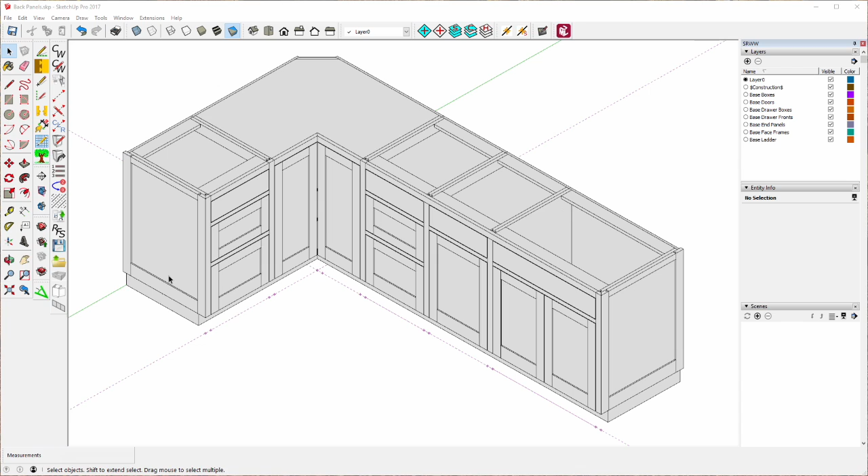You'll notice that this was designed to go up against a wall, but since this is an L-shaped island, I'm going to show you how to add back panels. But first we have to prepare it.

You'll notice that this trim sticks out a half inch. We need it to stick out the same thickness as the back panel we're going to put on. And the back panel is 13/16 of an inch, same as the face frame.

So first thing we're going to have to do is bring this out a little bit, and I'll do that right now. It's pretty easy. You choose this, right click, unlock it, right click again, edit component. Since it's a half inch now, which is 8/16, and we want it 13/16, we have to pull it out another 5/16. And now it should be out 13/16, and we'll just check that.

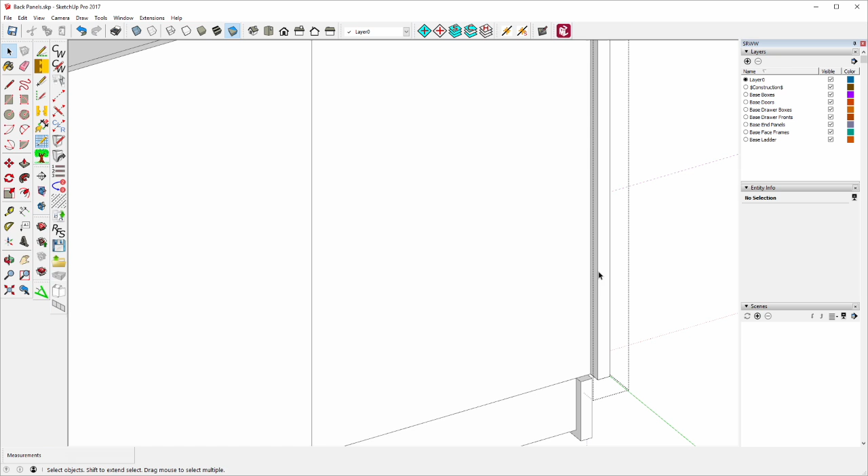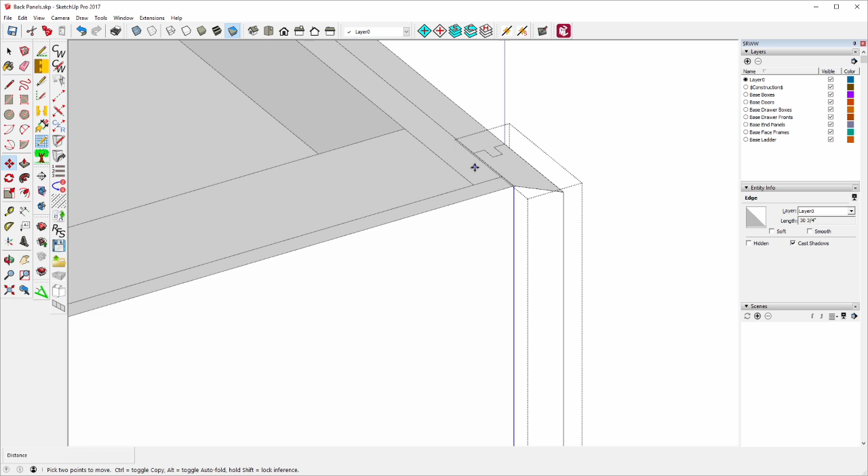Okay, the other thing is we want a miter joint here. So what I'm going to do is select just this edge here, that one right there, and move it with the move tool. I'm going to move it inwards 13/16. There we go. And let's just check it. That should give us a perfect 45-degree angle. And we can measure that to be sure.

It's not quite right, so we didn't do it quite right. Let me do it again. That should be it right there. And we'll measure it again one more time. Now it's 45 exactly. Okay, so now we have our miter.

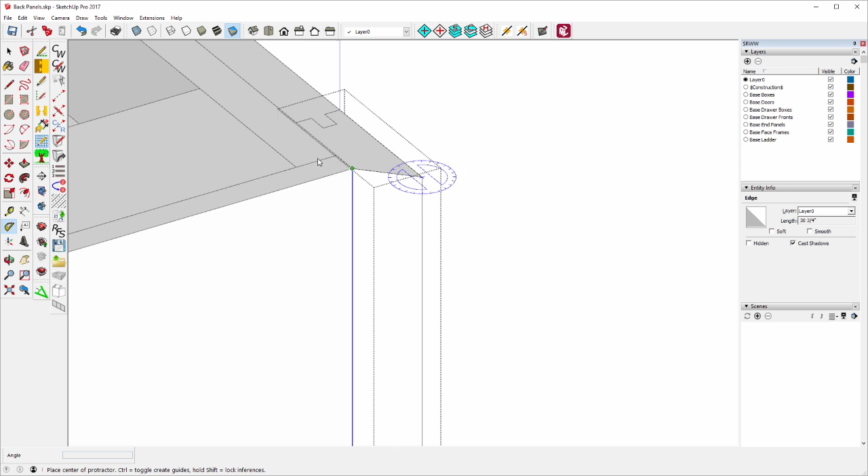We can get out of edit component mode. And we're going to have to do that to this one over here too, so we might as well do it right now. We'll unlock it, edit component. First we have to bring it out 5/16. And then we're going to move that line in, that'll give us a perfect miter.

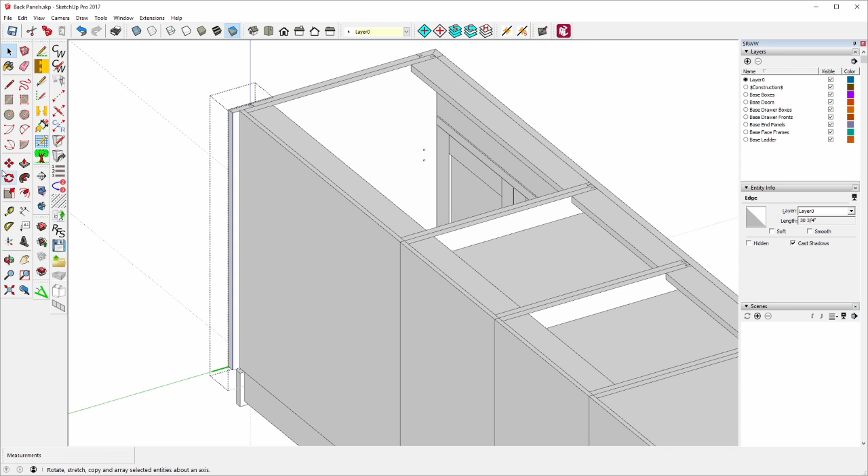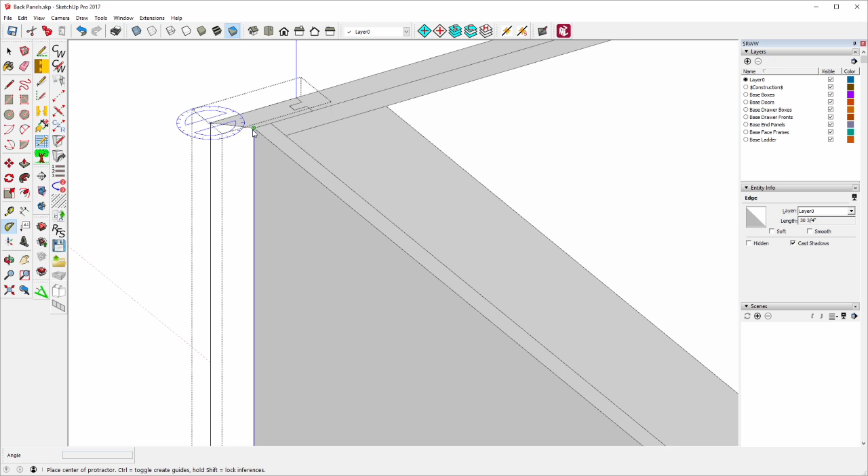And that should be it. I'm going to check it. We don't want any mistakes. And looking in the VCB, it's a perfect 45 degrees. Okay, so let's get out of edit component mode.

So just to help ourselves here a little bit, I'm going to take the rectangle tool and go to this point right here, the tip of that 45 degree, and go over to this tip. What that's going to do is give me this point right here. Let me show you why that's going to be important. I'm going to go immediately to the new tool, and you'll find it right here.

It looks like a back panel, and it's called Create a Back Panel. The way you use it is quite simple. Use the rectangle tool, go to this bottom point here, and go to this point right there. And now I have this back panel.

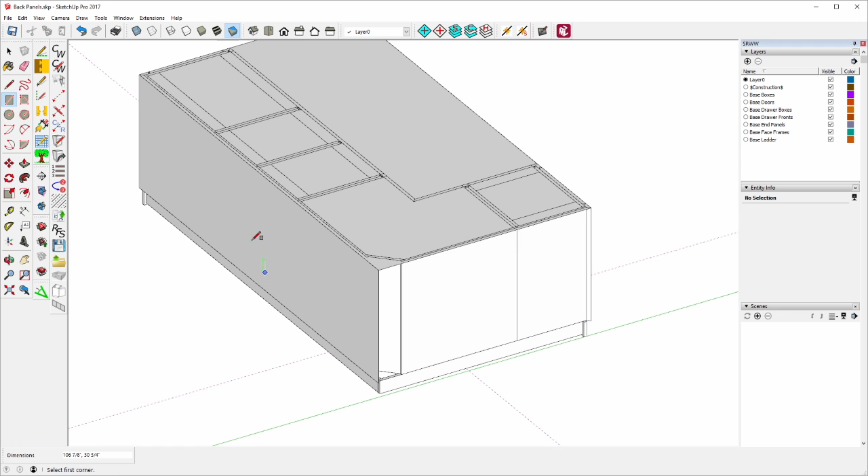Let me get rid of this. I'm sorry, just the face, that's all I want to get rid of at the moment. And I'm going to go and clear all layers and get rid of these as well.

All right, so what I've got now is just the back panel. If I go to show all layers, I've got the back panel. Now the question is, how many mid stiles in the back panel do I want?

Well, I can either add them at any spacing I want, or decide how many I want. I'm going to pick a number like 6. The way I'm going to do that is pick this top line. Let me clear everything else out so you can see this. I'm going to right click on it and say divide.

Notice right now it's dividing by 3. But in this VCB, I can type 6. Enter.

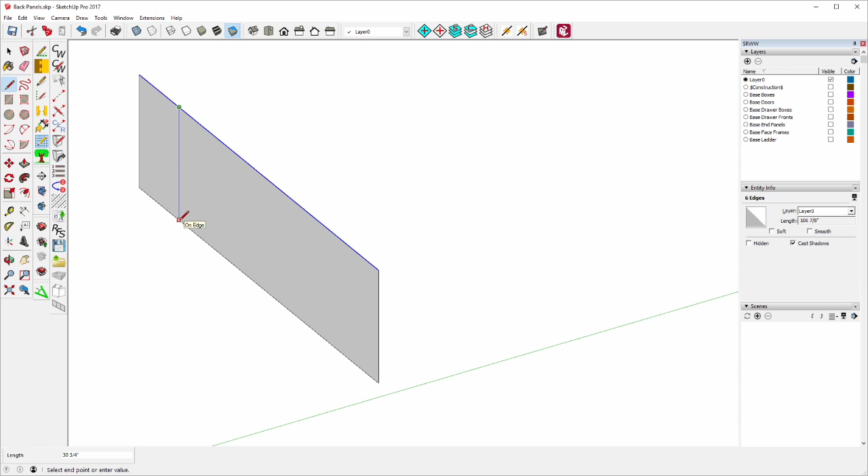Now what I've got is a midpoint, an endpoint, I have 6 endpoints. So I'll go from here down to the bottom along the blue axis on edge, find my other endpoint, go to the bottom, find my other endpoint, go to the bottom, and I keep doing this until I get all of them.

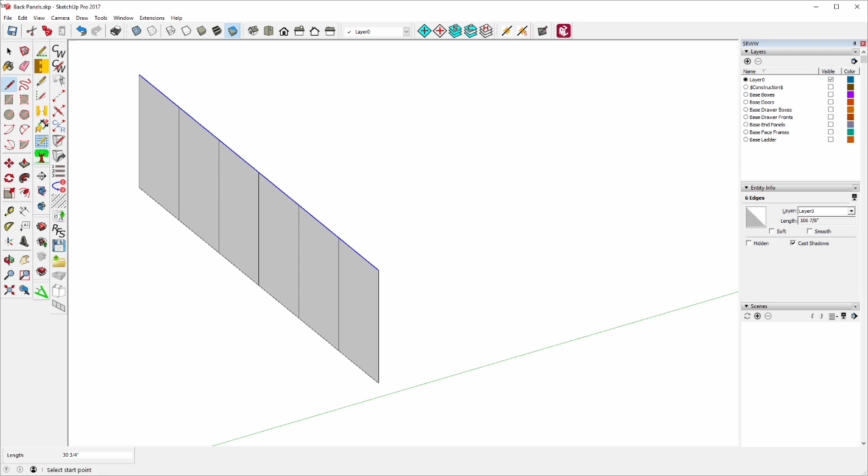All right, so that gives me 1, 2, 3, 4, 5, 6 panels. And now all I need to do is look at the CabWriter settings, look in the Panels tab.

Back panel style can either be the same style as the doors, or you can specifically choose flat panel or slab. I'm going to choose flat panel, which is the same as the doors right now. And I'm choosing miter because that's the kind of joint I want. So I'll close this.

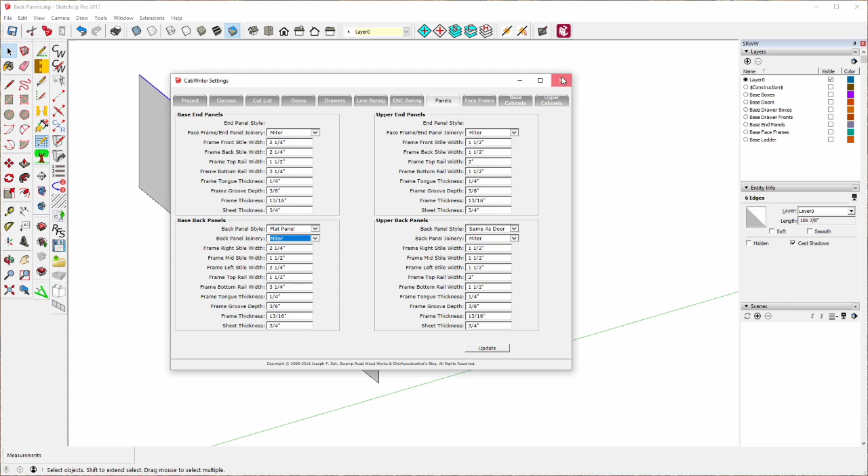And now it's a simple matter of triple clicking, clicking on this, create a back panel.

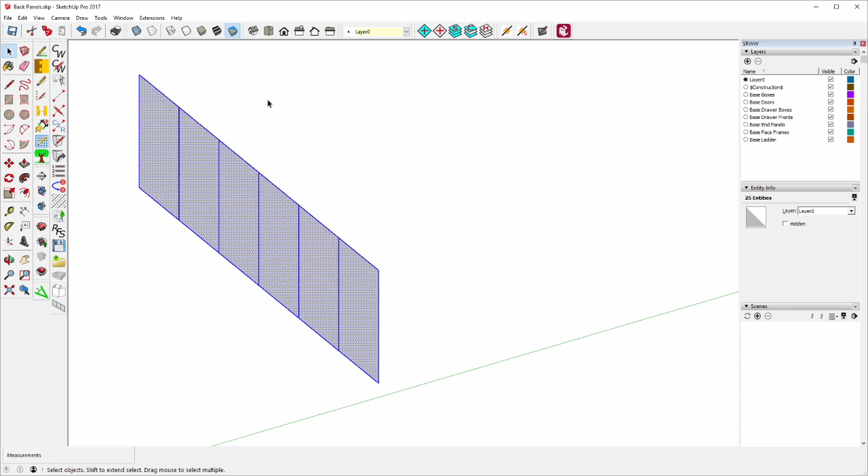Before I do this, what I want to know is what is the name of the cabinet I'm attaching it to. If I look in the entity info and choose one of those components, I can look over here and see that it's cabinet 2L. It's a base cabinet 2.

So again, I'm going to click on this and then click the new tool. And I want to type in here C2L, capital C, 2, capital L, and hit OK.

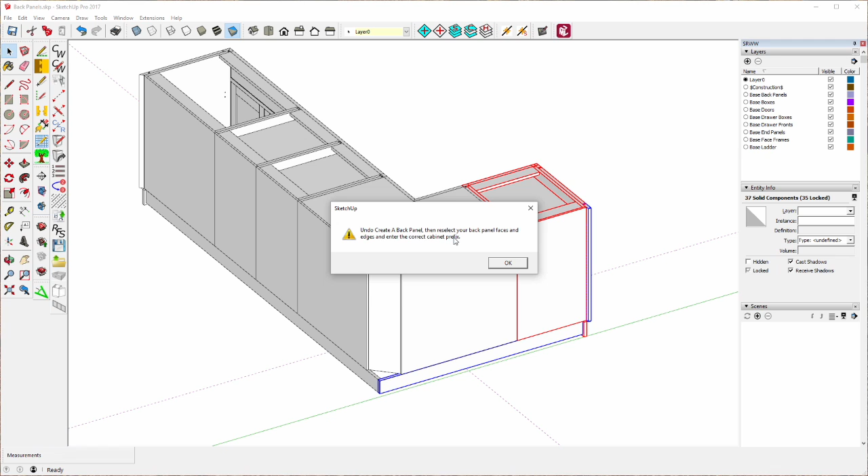And it says, is the selected cabinet the one that you wish to add the back panel to? Well, that's this cabinet over here, so I say no. And it says undo the create back panel, then select your back panel faces again and type in the correct number. I'll hit undo, click this back panel again, and apparently it's C1L that I want.

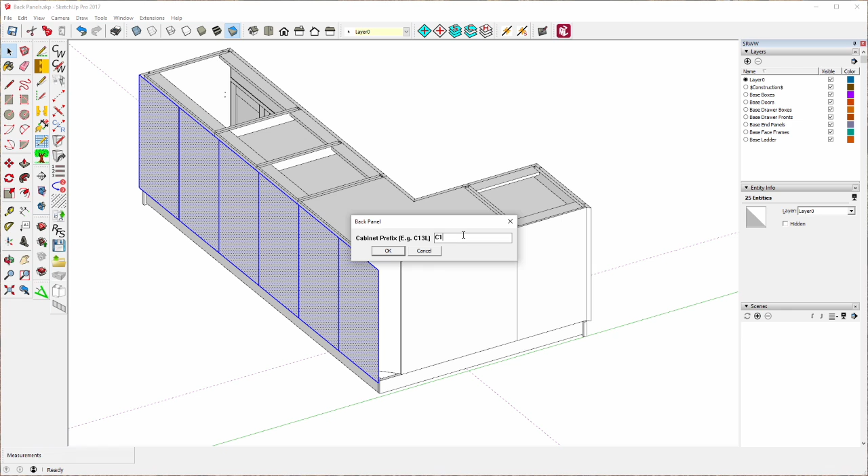So I hit OK, and it says, is this the cabinet you want to add the back panel to? And I'll say yes. And there you go, I have my back panel. Notice that I've got a nice miter joint there. I have 6 evenly spaced panels.

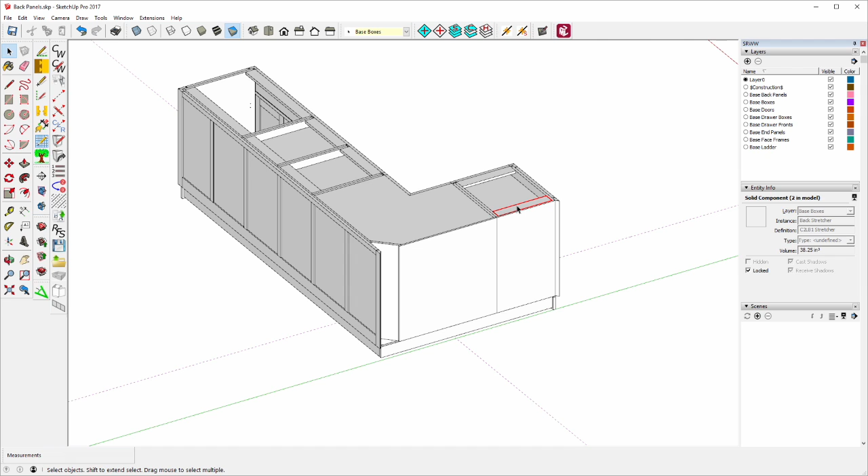And now I can do the same thing to this one, noticing that I'm going to assign this one to C2LB1, or just C2L. So what I'll do is take my rectangle tool and make sure I've got that right on that tip, and right on that tip.

And it looks like I'm going to want maybe 3 panels here. 4 might be a little narrow. We'll try 3. So I'm going to select this top line and say divide, and this time I'm going to say 3. Hopefully that's what it gave me.

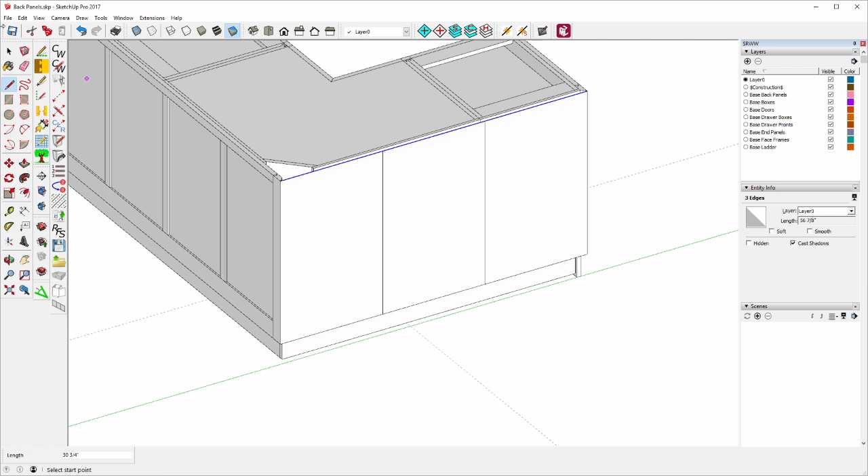It should be about here, endpoint. And it should be about here, endpoint. All right, now I just select the whole thing.

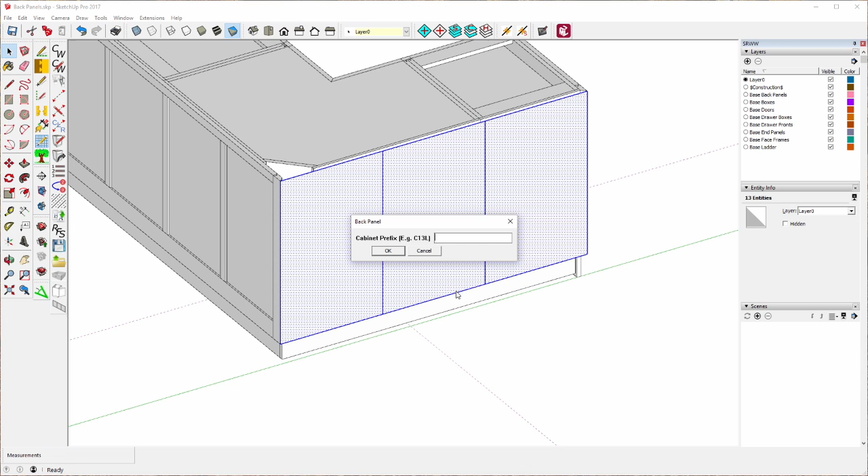I type C1L. And that's wrong, I wanted C2L. So I'll undo. This time I'll type C2L. And I'll say yes, that's the cabinet I want to assign it to.

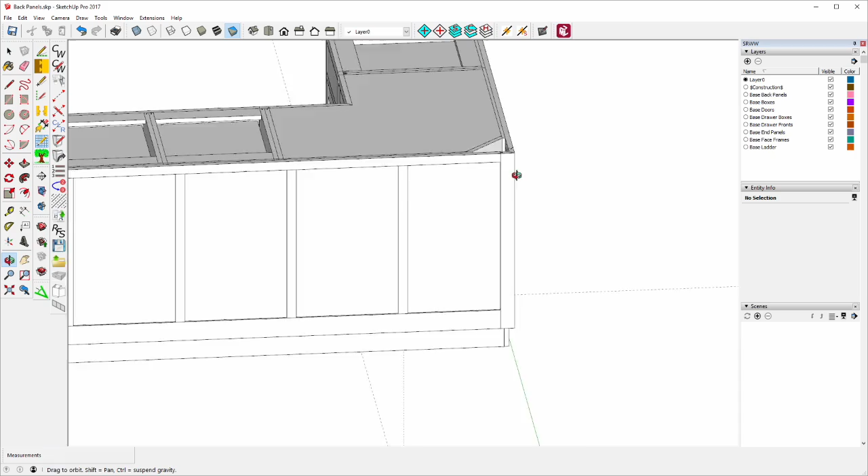And there we go. Notice I have a nice set of back panels. And have a good day.